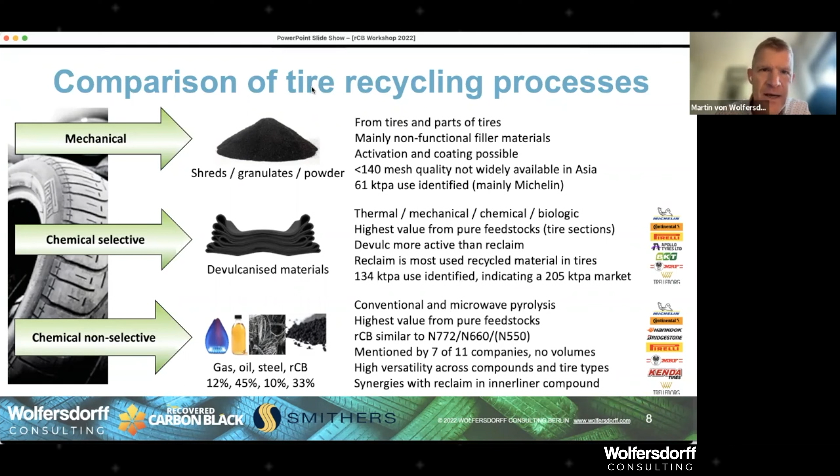So back to powder, really the main part of the 61 kilotons globally, I suppose that is going to Michelin. The second process we're looking at is chemical selective recycling. And I'm talking about devulcanized materials. And this could be reclaim or it could be truly devulcanized materials. And we have thermal processes, mechanical processes, chemical processes, and even biologic processes using bacteria. It's clear to devulcanize, we have to get a high surface. So actually the chemical selective recycling follows the mechanical recycling.

We have to separate the tires, we have to get the steel out, we have to get the textile out in order to devulcanize. And the highest value is from pure feedstocks. One circle that is working very well is butyl tube recycling. Tubes are just butyl rubber, so it's a very pure material stream that can go straight back into the same application.

Devulcanization is more active than reclaim. So reclaim processes typically are destroying the rubber polymer backbone chain as well, whereas the devulcanization is a little bit more selective. We could spend perhaps a whole workshop just talking about devulcanization, but the main topic is recovered carbon black, of course. Reclaim is the most used recycled material in all tires. I have identified 134,000 tons, so KTPA is 1,000 tons per annum, indicating a market of about 205,000 tons.

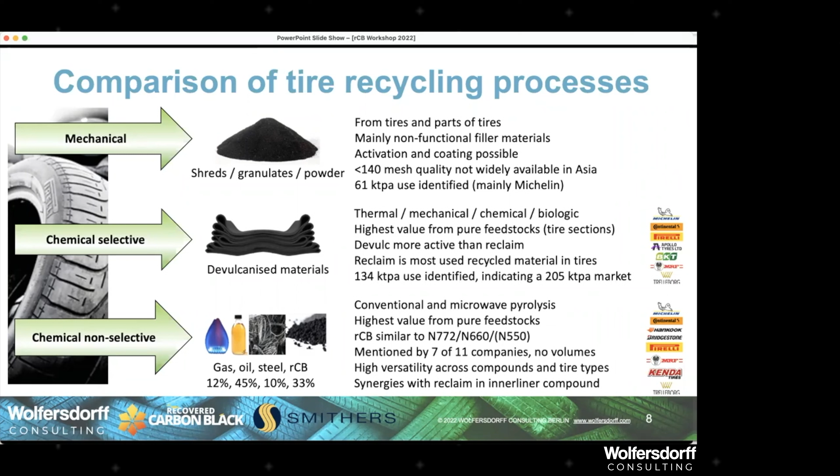So back to pyrolysis or chemical non-selective recycling. We said there's conventional and microwave. Now, I don't see microwave commercialized industrially yet, although I'm very interested because, as I said, the heating is from the inside and rubber is an insulator. So heating from the inside makes a lot of sense in terms of efficiency. Although, of course, the electric power you need is humongous.

Again, in the pyrolysis, highest value from pure feedstocks. We talk about the feedstocks in several parts of this workshop. The control of the end-of-life tire feedstock is super important for the consistency of the recovered carbon black product. Also for the other products, because depending on the type of tires you select, you might get more or less natural rubber and biogenic material, which is important for the gas and the oil.

Recovered carbon black, just broadly, is in rubber very similar to soft blacks. And the soft blacks are 700, 600, and ASTM 500 groups. I have a slide on carbon black to explain what carbon black is and how carbon blacks are categorized. But these are called semi-reinforcing carbon blacks. And recovered carbon black is in the rubber performance similar to semi-reinforcing carbon blacks.

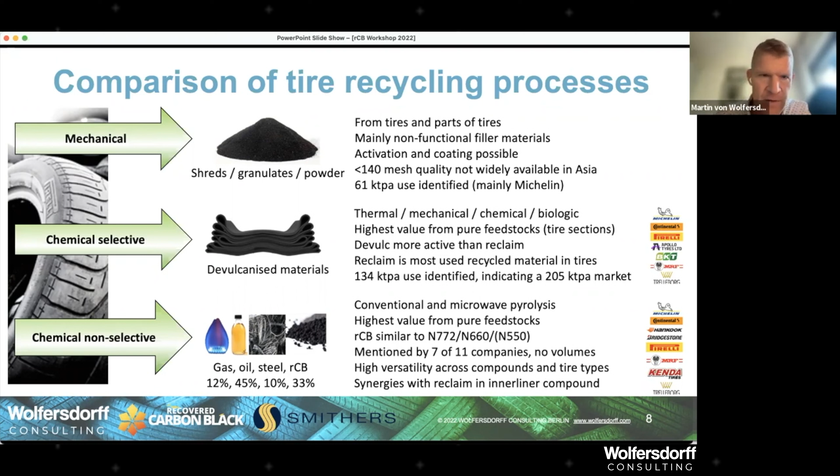So, tire pyrolysis mass balance. We said tire pyrolysis converts the end-of-life tires into different materials. It really splits the tires into different materials. And we also said the end-of-life tire feedstock type is very important. It could be PCR, which is passenger car radial. It could be TBR, which is truck and bus radial. It could be off-the-road, OTR. Of course, in some regions of the world, we might still have bias tires. It could be anything.

And why is it so important to look at what we are pyrolyzing? Because this is really governing the chemical composition that ends up in recovered carbon black. In this presentation, of course, the main focus is recovered carbon black. We'll see the gas is used for the on-site energy creation. The oil back then was mainly positioned as a renewable fuel, but nowadays it's more like a raw material, a feedstock for the petrochemical industry.

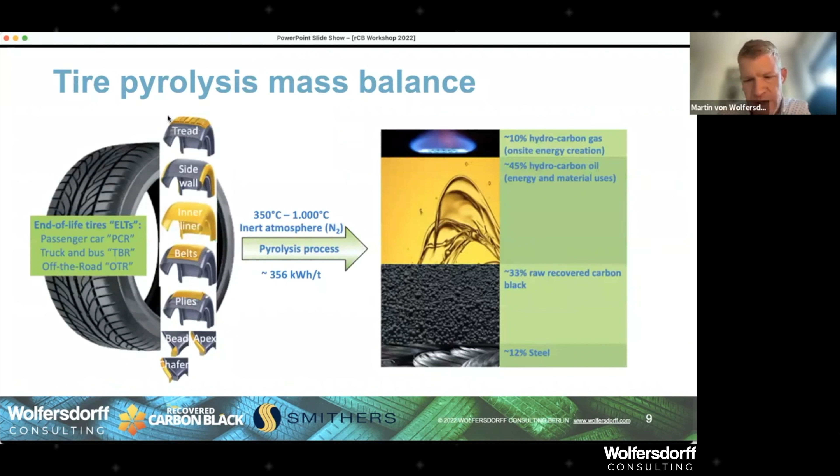Also, for the inorganic content, we could have crystalline silica, which is coming just from sand debris. The end-of-life tires, typically they're put somewhere, not in the cleanest warehouse. They might have been in the landscape. They might have attracted soil and sand. Some tires are even put underground. So there might be debris.

And really, if you want to have a chemical industry product, recovered carbon black, we need to make sure that the feedstock is as clean as possible, and that goes as far as washing the tires and washing the tire granulate before they go into the pyrolysis to avoid crystalline silica. Crystalline silica in Europe is less of a problem. I don't think in Asia either, but it's very high on the radar of authorities in the US. Because we get to milling a bit later on.

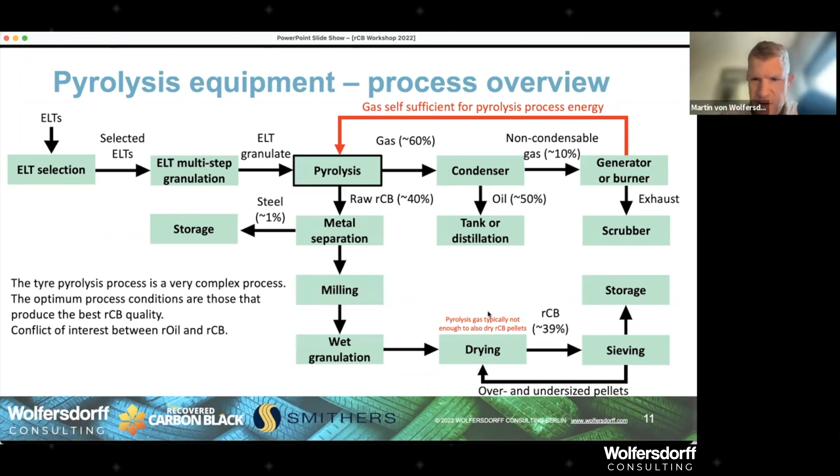So I think we have finished that slide. And this is the process again. I don't go deep into everything, but just to show important parts of the process for the recovered carbon black quality. And I promised you a sketch of what it is like to heat the rubber in a microwave and in a normal conventional kiln.

As I said, the rubber granule is an insulator, and when we put energy in in normal pyrolysis, it's by temperature. We can actually put a vacuum, then things happen quicker, and by residence time, and also by surface area, so size of the granules. But we're heating from outside in, and that takes a long time. And typically, volatiles are higher than 1.5%.

Whereas in the microwave, we're heating from the inside out, and the steel actually helps us because the steel is excited by the microwave radiation, and the carbon atoms are heated, and then it heats from the inside out, and the rubber is bursting because inside, the rubber granules are already cooking and boiling, outside not yet. So that is much more destructive than conventional pyrolysis.

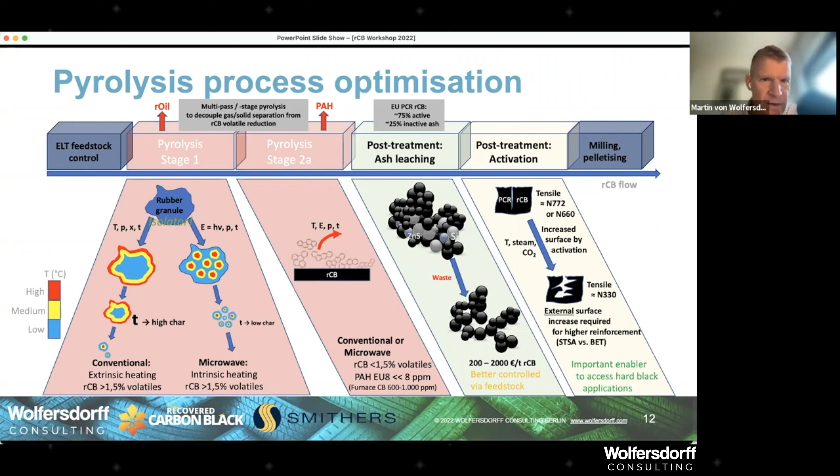Question coming up: could you explain the ash leaching process? So typical ash leaching processes are with acid and base. So you're leaching chemically with a lot of acid and a lot of caustic. And then, of course, you need to get the pH right again by washing. Or if you had washed with acid and you then wash with caustic, you might get back to a neutral pH value again.

The problem of that process is that typically when you wash with acids and caustics, you get salts, and these salts would be waste. At least they have no known commercialization yet. There is one company that claims to have a process that has less waste than the typical acid-base leaching process, but I haven't seen that company industrialize just yet.

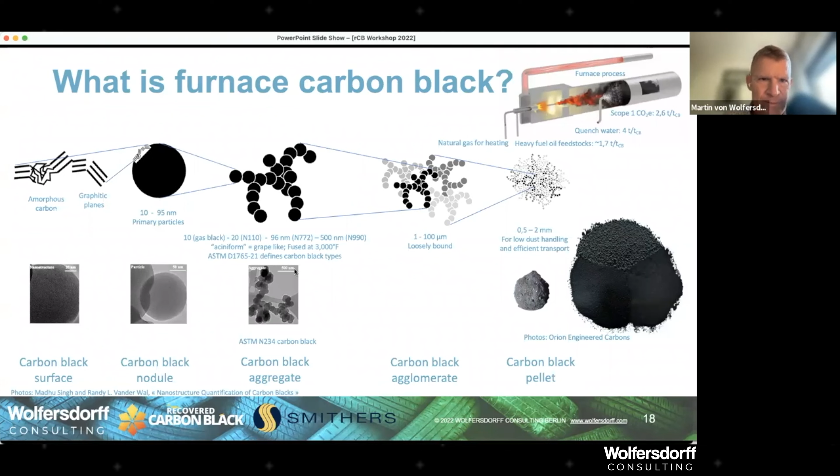Now, let's look a little bit at the history of carbon black and the furnace process, because recovered carbon black is often compared with furnace carbon black. And about 96% of all carbon blacks nowadays are manufactured with the furnace process, because it is so versatile and can manufacture so many different types of carbon blacks for all the various applications in tires, rubber, plastics, masterbatch, paints, conductive and non-conductive. It's just impressive how flexible the furnace process is.

But in 1830, we had the lamp black process with the feedstock oil. Then the channel process came up in 1864 based on natural gas feedstock. And the particles were collected in so-called hot houses, in the smoke houses. And about 20% of the particles were not collected. So hundreds of miles and kilometers away, you could see where there was a carbon black manufacture, because there was a large black cloud over that particular town.

First carbon black in tires was 1910 by Goodrich. The first gas furnace process was 1920 by Columbian, nowadays Birla Carbon. And really the plant capacity was pretty small in 1923, 400 tons of carbon black per plant. And you can compare that with recovered carbon black. We get to recovered carbon black in a moment.

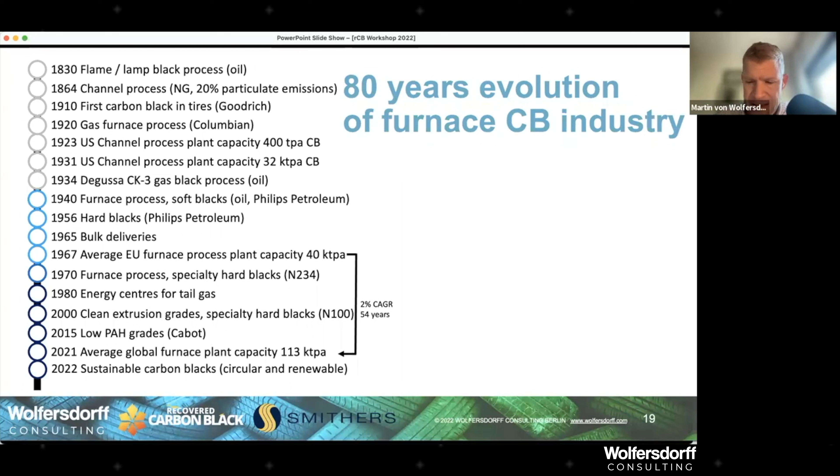So what we can say, the furnace black technology has developed in 80 years. We look at recovered carbon black in a moment. We first look at carbon black markets and what is going on in the carbon black world. But we will see that actually recovered carbon black has already outgrown the very small and slow growth of furnace carbon blacks in its beginnings. So let's jump right into the cold water, let's say.

Let's look at global carbon black markets. And you can see boxes, different regions. I've excluded South America because there's nothing particular to say about South America, really, in terms of market shortness, oversupply, or very striking developments. What you can see, two boxes are red, and these are the regions where furnace carbon black and carbon black in general is short in supply.

Let's start with Europe. Car sales are down, so the OE part of the tire sales is not good, but replacement is very good. Carbon black demand forecasted for this year around about 1,750,000 tons. There's a supply gap, however, and the supply gap is very big. It's about 670,000 tons this year. And the supply gap, as Orion Engineered Carbons has shown in an investor presentation, is actually growing over time. So there might be a 760,000 ton supply gap by 2025.

The worrying bit is that this supply gap is filled by Russian carbon black. 32% of all carbon black into the EU, so European Union, Europe, is from Russia. Even more when we consider Belarus and Ukraine, and then it's 36% of all carbon black in the EU that comes from these three countries.

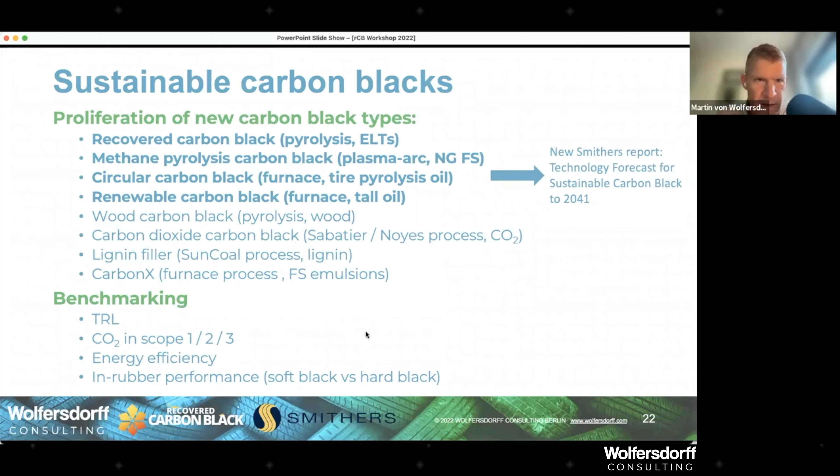Let's move on. So we looked at the history of carbon black. Now let's look at the history of recovered carbon black. And you might not have seen this. And both histories came out of my collaboration with the RCB rubber project.

And I was asked, how is the evolution of the recovered carbon black technology compared to the evolution of the furnace technology? Now, what I think is recovered carbon black technology is actually developing much quicker than the carbon black furnace technology.

Let me explain. So really, tire pyrolysis started in the 1980s, looking only for the oil, and the black stuff that was coming out was discarded. That was the oil crisis, and people were interested basically in a replacement for the oil and the fuel. Sustainability at that point, I don't think was as important as it is now.

Back then, actually around 2000, the recovered carbon black was called CBp, carbon black pyrolytic, with a P, not like I put it here, but with a P in the lowercase.

2014, Bridgestone Americas, because Bridgestone is very regional, Bridgestone Americas invested into tire pyrolysis company Delta Energy. That collaboration is still today. They have developed recovered carbon black; on the ITEC conference in 2017 or 18 they've presented about use in inner liner and sidewall. That was, or is, a good collaboration.

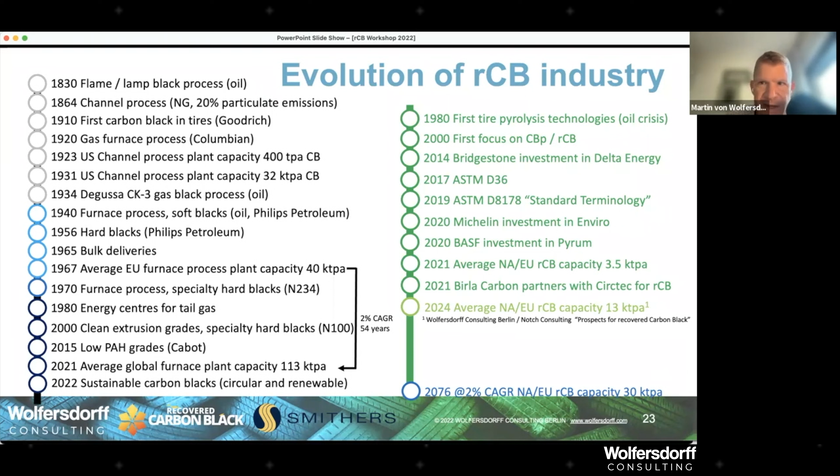I think 30,000 tons recovered carbon black capacity we will have already by 2030 when I look at the projects that are ongoing at the moment in the Western world. In China, there's big installations. We get to that in a moment.

So let's go on. Actually, here is the map of operations that are producing recovered carbon black already now. I will not describe it. You might recognize some of the players: Delta, Bolder Industries, Pyrum is there, Enviro is there on my screen, hidden by the zoom bar. ReOil is the biggest industrial producer in Europe at the moment. New Energy is there. I don't think Möbius in Ukraine are running at the moment for obvious reasons.

In Asia, Restec might be the one company to follow, with 3 plants by now, 2 in Taiwan and 1 in Thailand, which they also manage. Big installations, as I told you, in China. These are installations of 100,000 tons capacity for end-of-life tires, but very little is known about the quality and the output of recovered carbon black.

Frederick is asking, what is the typical valorization of py oil resulting from rubber pyrolysis presented as RCB co-product, even if it's the major product? You know, typical mass balance would be some 40% recovered carbon black, 50% oil. So they're really co-products, and not one is much bigger than the other. You could argue that recovered carbon black has a higher value, clearly over €1,000 per ton, which we'll see in a moment. And the oil, maybe not 1,000, unless it's a very specific oil, like a Circtec oil, which is really very high quality, post-treated.

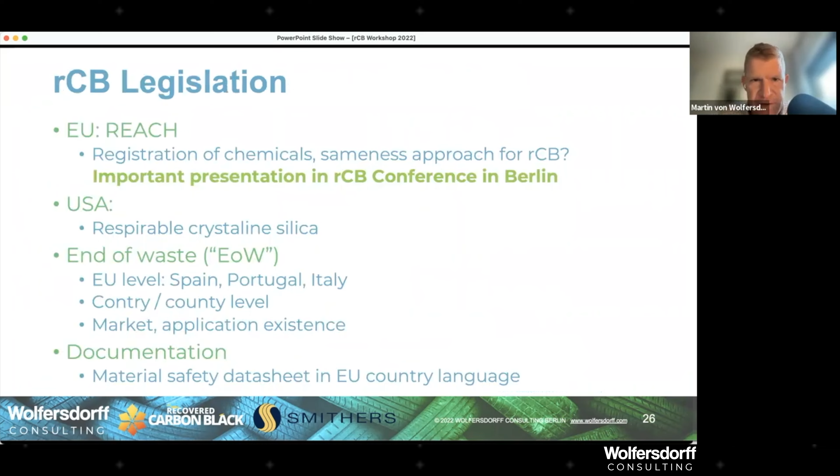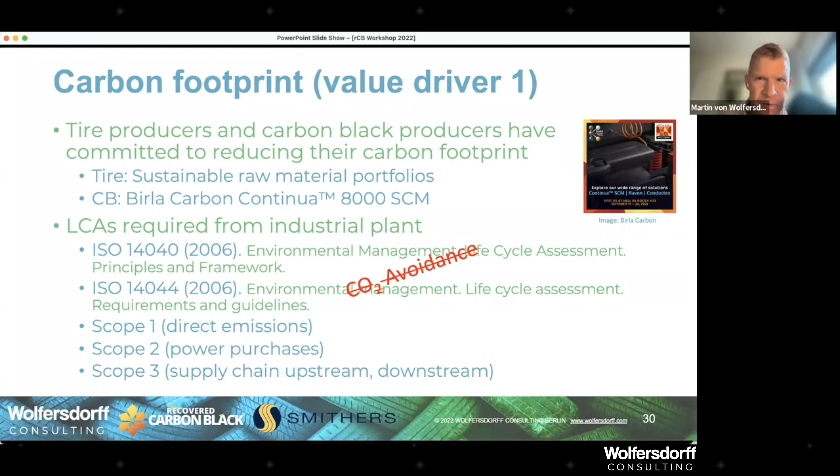Same, at plastic master batch industry, one large part, 30-40% of plastics use is plastic packaging, and food packaging is predominant in the packaging. So there might be food contact packaging. You need to be low in the benzo(a)pyrene level. There's some other specifications. In European Union, there's now a unified food contact regulation. Switzerland is different. US is different.

US is actually magnitudes more difficult to achieve. There we're talking about parts per billion, not parts per million benzo(a)pyrene in the plastic material that comes in contact with food. Of course, there's even more stringent regulation for medical plastics, but I'm not touching here because I wouldn't think that recovered carbon black goes into any medical plastics.

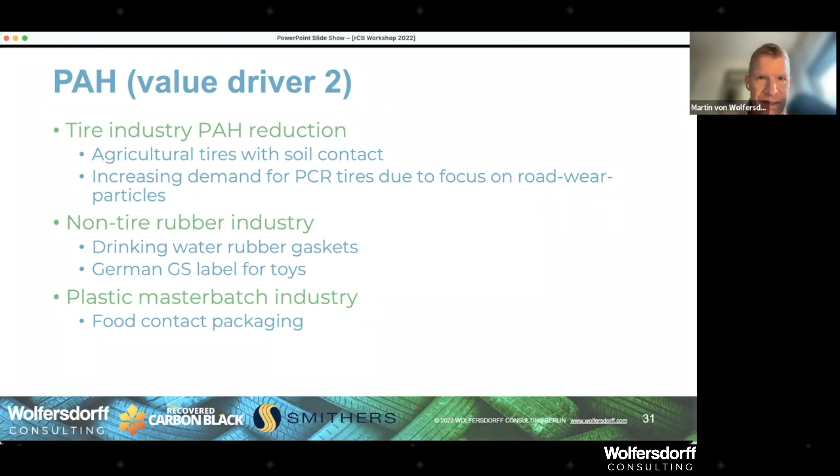Process integration. And sorry, these slides are text heavy, but these are like the brainstorming slides of the workshop. And there's not many pictures because many of these things have not been realized, so that we can show some pictures, or they're super secret. So let's consider the scenario of a tire pyrolysis at a carbon black producer.

This would be nice because the tire pyrolysis oil could be used as a circular feedstock like Orion Engineered Carbons, or a blend stock. So feedstock is 100% use, and blend stock is if we say we're putting 30% pyrolysis oil to a carbon black feedstock oil, fossil oil as normal, to the carbon black production.

And this is the model, the BlackCycle model, where you might know BlackCycle is a European Union funded project. Michelin is leading. Aliapur is collecting tires and also preparing granules and shreds. Pyrum is the pyrolysis company, and there are some distilleries and petrochemical companies. And then Orion Engineered Carbons makes circular, sustainable furnace carbon black out of the tire pyrolysis oil.

Of course, the potential for sales is either blends or direct recovered carbon black. For example, as Birla Carbon does, but calls it a different material, sustainable carbonaceous materials. Then tire pyrolysis at tire recyclers.

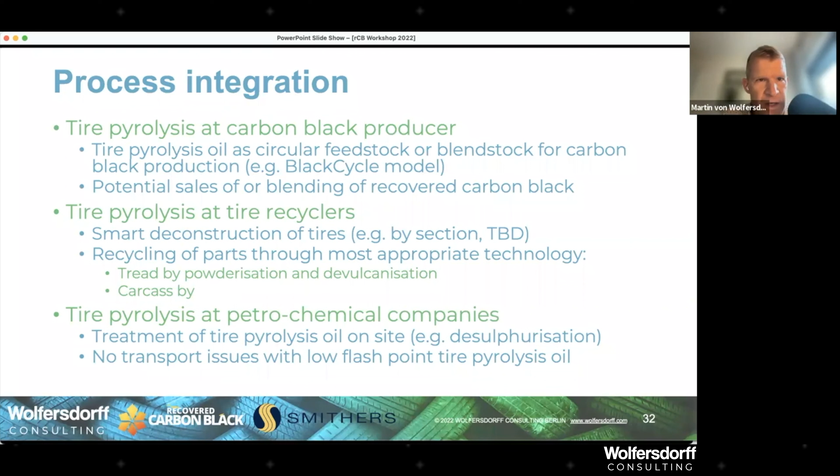Blending. Now, here's the value driver 3. And back to the topic of the workshop, to the rescue of carbon black. We have a shortness of carbon black, so blending or extending could be a really nice synergy.

Now, you have to know that the furnace carbon black industry is already bleeding. Bleeding, coming from blood, the idea is little droplets of material. The furnace carbon black industry also has faulty material, which is quality tested and doesn't comply to the specification, and it is separated. But they put 1 to 4% of this out of specification material into each and every carbon black, and the tire makers don't really see it, because at that percentage you don't really see a high impact of any non-conforming material.

If you consider the global carbon black market, this bleeding market could be a market of 552,000 tons per year across the globe. The only trouble is it's already used by the carbon black industry for their non-conforming, non-compliant material. Also, it is a no frills and low impact application. Just hiding dust under the carpet.

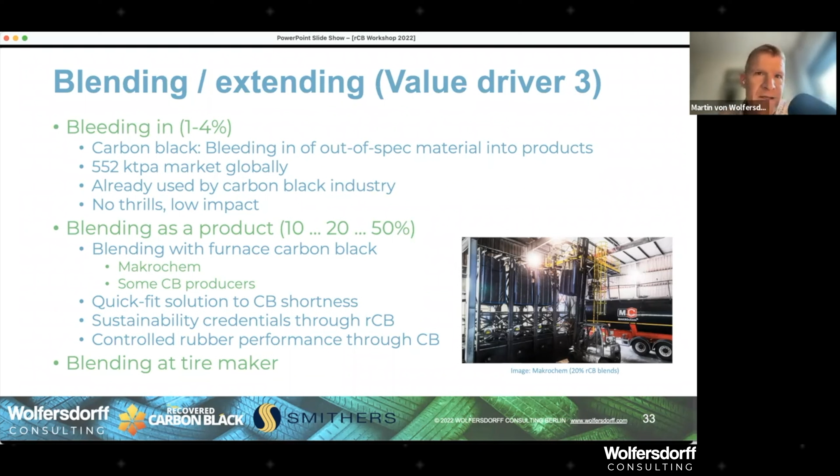Logistics. Now, this is my favorite example. Imagine a tire pyrolysis at a tire maker. What is nice is, generally with recovered carbon black, we look at the end of life tires, consumer tires that are at the end of life, but the tire makers also have industrial waste. They have tires that are non-conforming, non-compliant. They have in-process waste. So that could be directly recycled in the tire pyrolysis at the tire maker.

Then, this is my favorite point. The truck deliveries of new tires go to the service point, to the garages. Now, these garages, for every tire they sell, they take in one tire that is end of life. So they could actually return to the tire company where we have the tire pyrolysis and therefore tire recycling facility in the same truck. And the volume should be similar because for every new tire, we have to take in one old end of life tire. And so reverse logistics, I like that a lot.

Also, some furnace carbon black silo truck deliveries could return to carbon black companies loaded with a silo delivery of recovered carbon black. So actually, that would be another flow. You might know the silo deliveries of carbon black are quite expensive. And although sometimes stupid deliveries are made over thousands of kilometers, typically a silo delivery is not cost efficient if it goes over 500 kilometers. And that is because the silo truck is coming back empty.

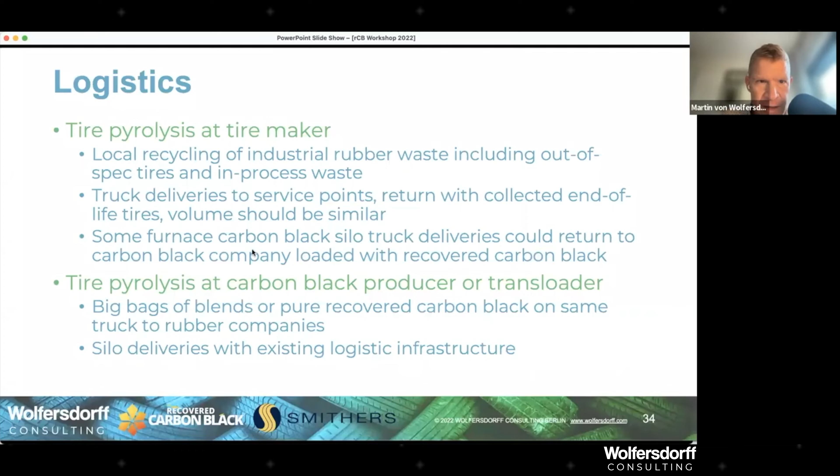Ignacio, thank you for another question. Can you repeat the D97 10 micron spec for agglomerate size and which types of silica are not desired? Okay, so let's go back in the presentation to the slide where I had my specification, which was here. So that is my own view of the state of the art of recovered carbon black.

To be honest, there is almost no company that is fulfilling this specification. Many companies come very close in many regards, but for some companies, as I mentioned, the consistency has to be proven on the industrial system. So 10 micron milled particle size. Here, I'm saying laser diffraction, ISO standard or the ASTM standard. We now know we need to define more, and that is in the comments. So laser diffraction, we need to specify it's a dry laser diffraction, not in the liquid medium.

Also, the pressure is very important. Here, the industry standard seems to go into the direction of 2 bar. And also then there's a Fraunhofer algorithm because the laser rays are diffracted, so they change their course, and the algorithm is calculating the particle size with the assumption that the particle is a sphere. But, as I've shown, neither carbon black nor recovered carbon black are spherical particles. So it's an approximation at best.

And there is a work item in the D36 group, which is working on this laser diffraction particle size method. But this is what I defined with the means at hand I had. And the D97, to repeat, this is the material, the spherical material corresponding to 97% smaller than 10 micron. Nowadays, I would say maybe it's a bit harsh. Maybe 20 micron is good enough.

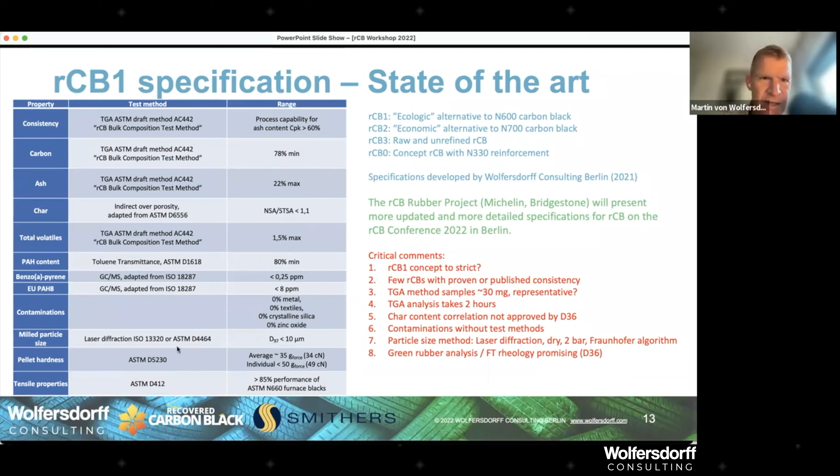The other question from Ignacio was about the types of undesired silica. Now, you could argue silica as a whole is undesired for sure in Europe, because we want to get below 20% ash, so that we could argue for the short term with the sameness approach under REACH that we have a carbon black, not a recovered carbon black. There is a type of carbon black that is allowed to have 20% ash. And that's not the only condition we have to fulfill to have the sameness approach with carbon black. There's other items we need to cover as well. But the general ash level needs to be considered.

And then, of course, the silica is a major part, certainly for Europe, the amorphous silica. And it's the same like with the carbon, where we can have amorphous carbon and we can have crystalline or graphitic carbon. Silica is also in both modifications, and the precipitated silica is added as a high-performance filler for the tire treads to provide lower rolling resistance, higher grip. Unfortunately for the tire, the wear rate goes up, so the longevity of the tire goes down if you use silica.

But in Europe, the US, and increasingly in China, the tire industry is using precipitated or amorphous silica as a filler in the tread. And the undesired silica compound is the crystalline silica, which is also known under the name sand. Sand coming just from road debris, either from the use time or from where the tires have been stored. And when we mill the recovered carbon black ultra fine, under 10 micron, the crystalline silica under 10 micron becomes a respirable crystalline silica, and that has a carcinogenic effect if you inhale it. Of course, you would never inhale that crystalline silica coming from the recovered carbon black, because the recovered carbon black would be used in the tire, bound in the rubber matrix.